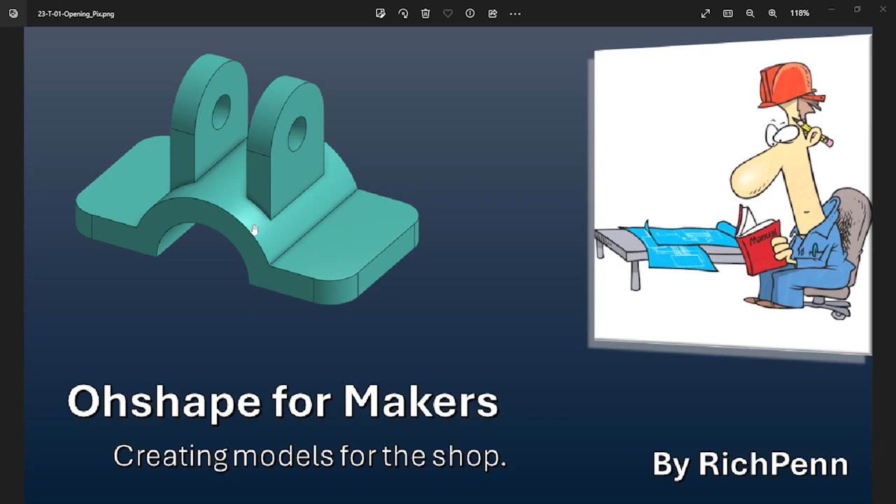This is the part for today, and the part is actually going to look like that. Notice the really fine, high dollar free 3D paint I'm using - don't have a good thing, so make do.

This part, if you look at it, looks weird, but if you go at it logically, it's not really bad. If you try to do something a little bit off, you run into a lot of problems with where these two flanges intersect with that curve. The solid modelers get a little crazy and start having some problems sometimes if you don't do it just right, but we're going to avoid it by doing it the simple way.

What we're going to do is start a drawing, and we're going to be looking at the center line from this face, and we're simply going to draw this shape and extrude it out till it's that width. Then we're going to draw these two ears in it and extrude them out until they're this width, and then we're going to poke a hole in them and round the corners and be done. Simple enough. So let's get things set up to where we can get started.

In Onshape, create a document: 23-T-01-half clamp.

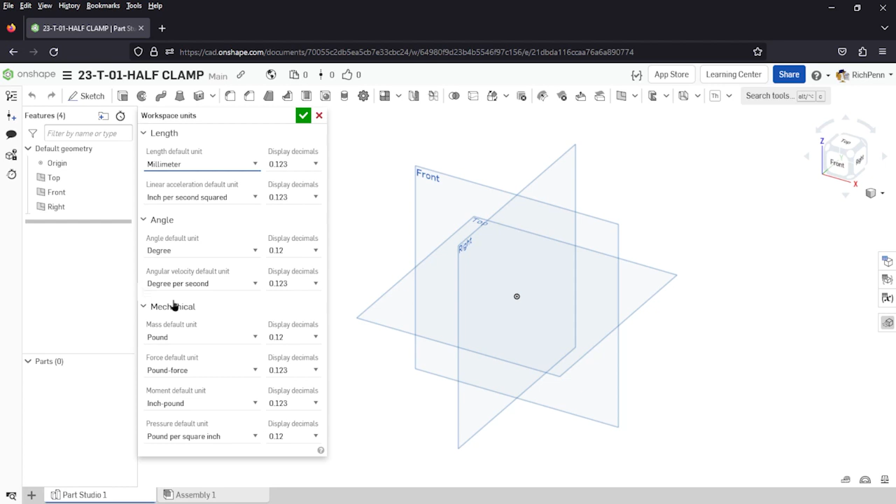If you'll notice, this is in millimeters, silly millimeters, so we have to tell Onshape by hitting the hamburger menu, coming down to workspace units, select inch and go to millimeter, select mechanical pound, go to gram, green check mark, and now we're in millimeters.

To start drawing, we're going to use this plane to draw this, and we're going to draw it as a rectangle, and then we're going to draw it as two arcs.

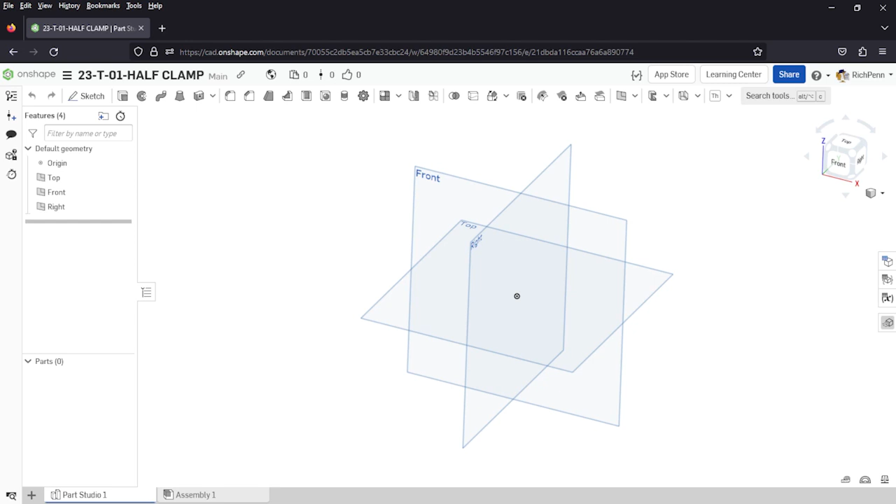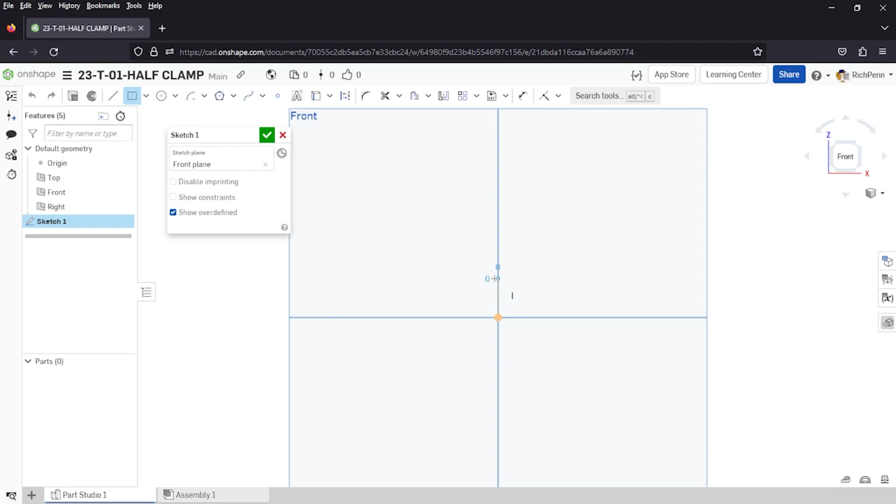So, front plane, sketch, N for normal. Go to rectangle, you want center point rectangle, catch the vertical line somewhere above this dot, click once, pull out, pull down until you connect with that line, click one time.

This distance on the blueprint is 13, and this distance is 150.

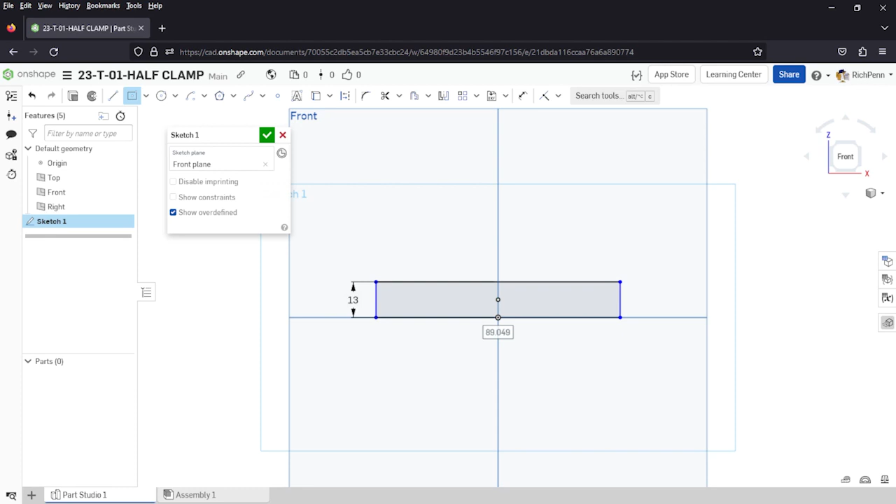Well, it missed. Okay, if you lose it, you can always go back and just type D for dimension or select dimension, then select that line and type in 150. It does an auto dimension when you first create it. If you lose the auto dimension, you just go to the dimension tool and dimension it. Hitting escape will turn that off and let you catch this. Left mouse click, drag it out and put it somewhere where it makes sense.

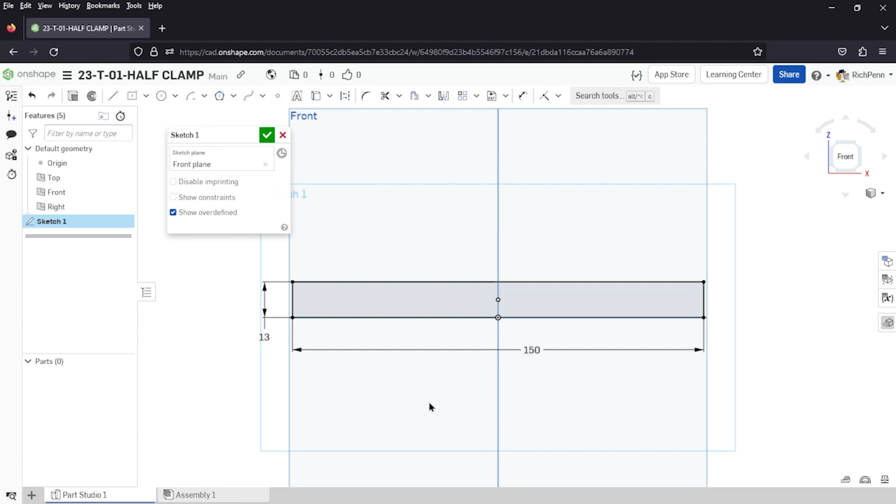Now what we need are the two arcs. The two arcs, if you look at them, are defined as a radius of 38 and a diameter of 50. They did it because this was a contest drawing, and they like to throw in little oddballs just to catch the contestants.

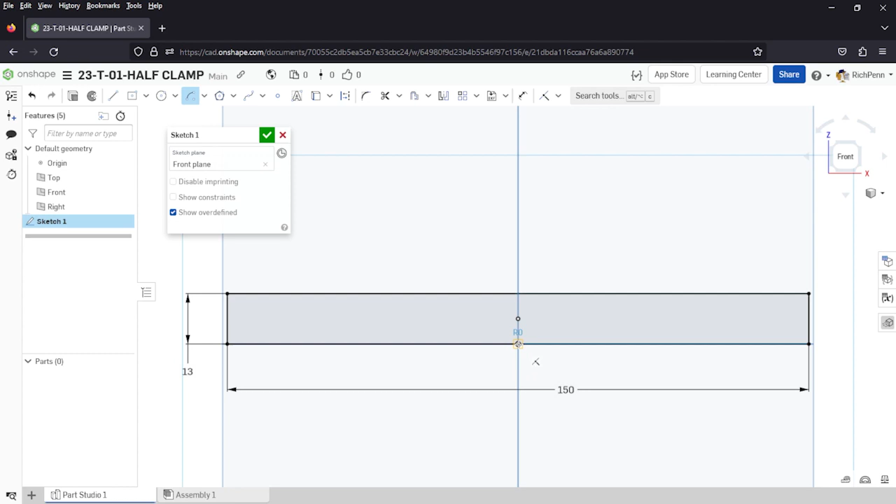So what we're going to do is draw the radius of 38. We're going to come up to the center, to the arc tool, and take center point arc, select the dot right here. You get a big circle. Doesn't matter where you go, just select this line and tell it you want a half circle to that line, and it will ask you for the radius, and the radius is 38.

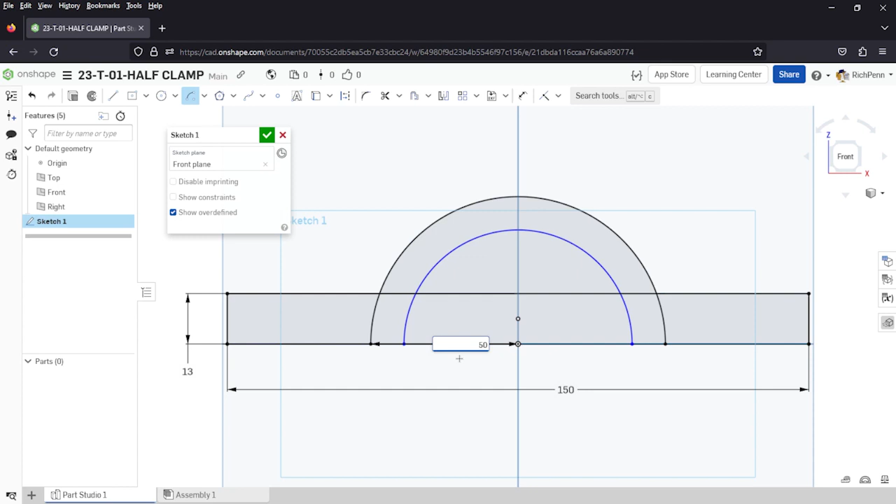Now we're going to do the same thing again. We're going to click, pull out short of where we were, go half circle, and remember the drawing gave us a diameter of 50, which would be a radius of 25. So I'm going to type in 50 divided by 2, let the system do the math, and select check mark. Now what we want to do is extrude this, and we're going to select extrude, and select the pieces we want to extrude.

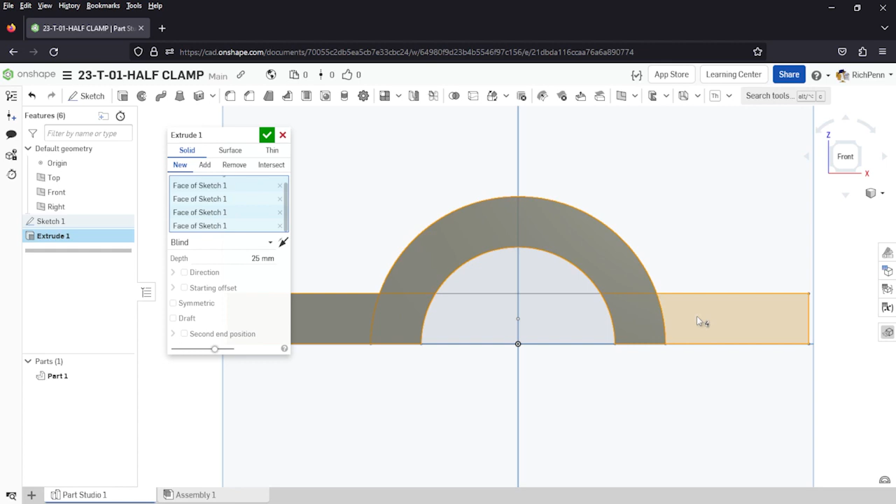Grab your mouse and tilt it a little bit. Select symmetric. If you'll remember, we're going 83. So we type in 83, enter, green check mark, and there is the first part.

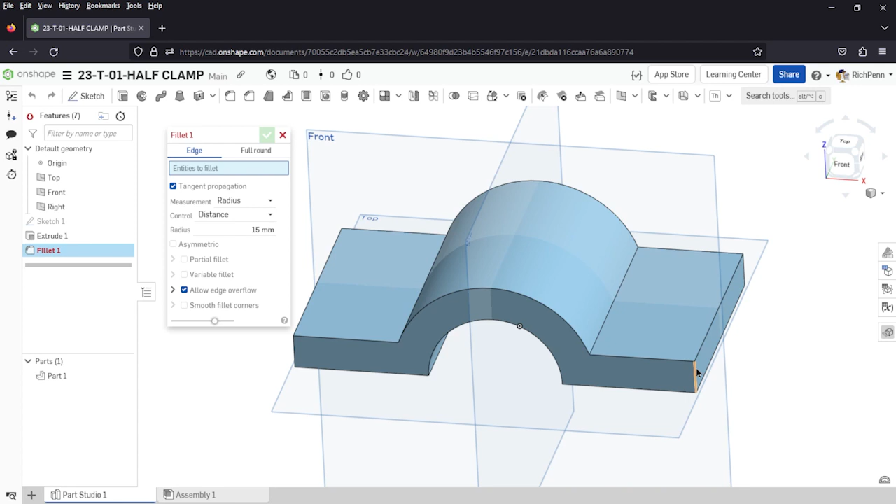To round the corners, we'll go to the fillet tool, type in 15, select that line, that line, that line, that line, and green check mark. That finishes that part.

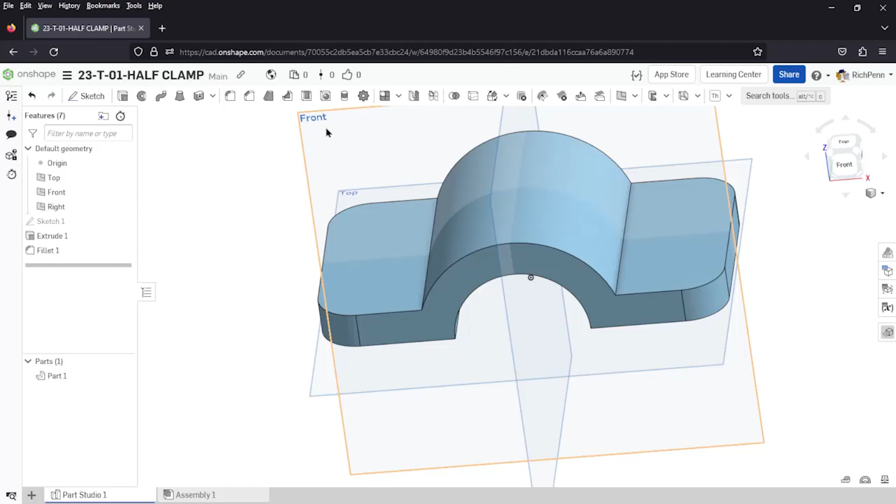Now we need to do these two ears. If you'll notice, the ears are symmetrical about the center line. It's 28 millimeters between them, and each one is 13. Select front and sketch, and N for normal.

Now you need to come up here to this, it's called use, project, or convert. What we want to do is select that line, which references the geometry we did in the new sketch, and ties it together logically in the back end of wherever the history is.

It will come over here to center point rectangle, and come up here and select construction. We will select a line here, pull it up some distance, and remember this distance right here was 28. The rest of it we really don't care about right now, so we'll just hit enter or escape and leave it.

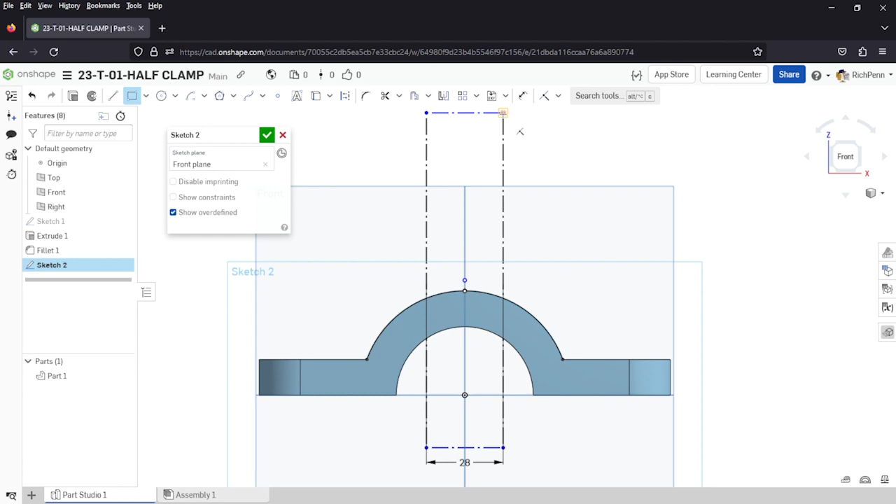Now we need to make the two ears, and to make the two ears we'll take a corner rectangle. We'll select this corner, pull out a little ways and pull down until you connect with the arc here. When you connect with the arc, it will ask you, maybe, there it is, and you can type in 13 and escape.

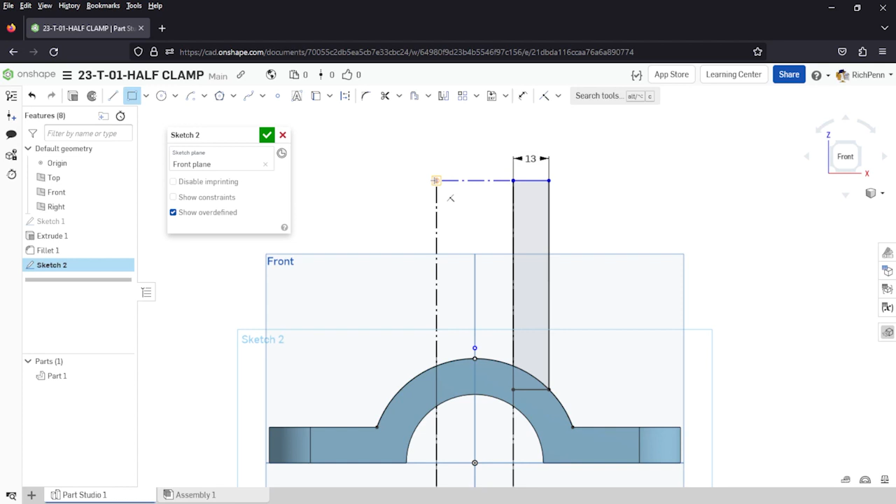Then we will do a corner rectangle, connect with the corner, pull down until you connect with the radius anywhere, click on it, type in 13 and hit enter.

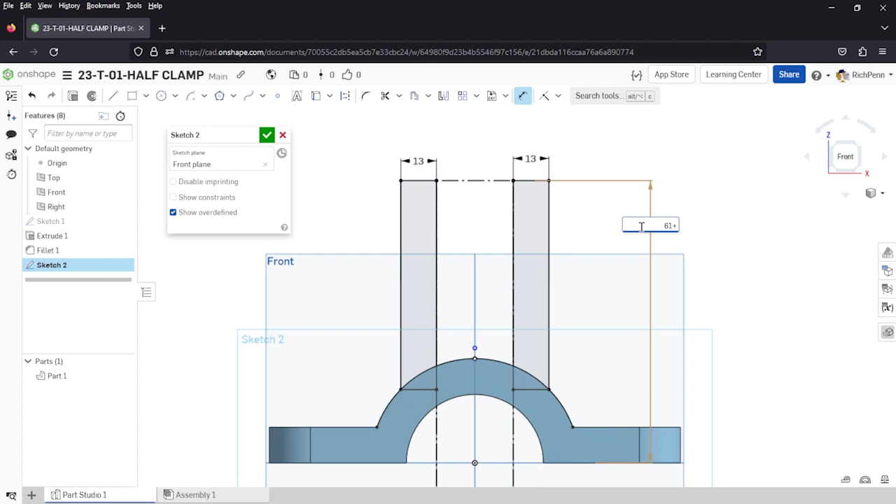Now the only thing we have left is the distance from here to here, which is 61 plus 25. So we will go to the dimension tool. We will select the base of the part, select the top of the tab, and type in 61 plus 25, enter key, and a green check mark to close out the sketch.

And now we have our ears ready to extrude. So we will select extrude, symmetric, and select the two ears.

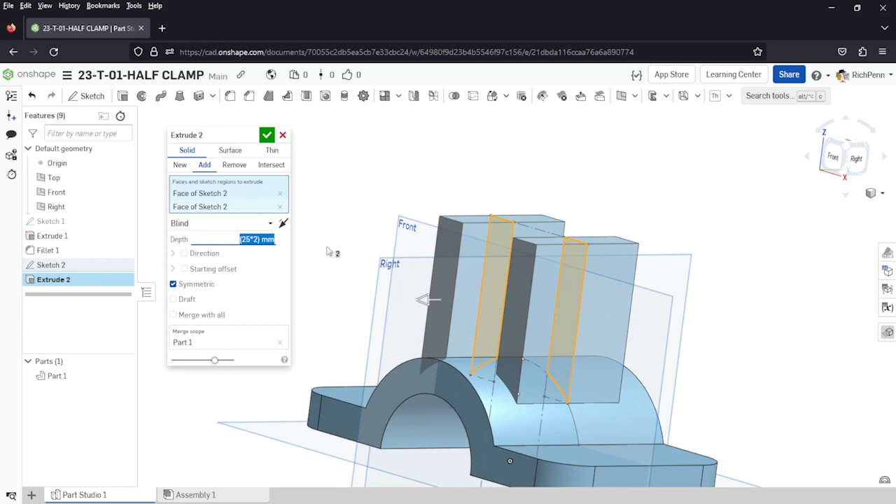If you'll remember, we had a 25 radius, which means this is 50. So we will type in 25 times 2. You can do it in your head, but if you do it this way, when somebody reworks a model, they will see how you got the answer.

Okay, green check mark. Let's see how this fits perfectly up here with no errors. That's what you're looking for.

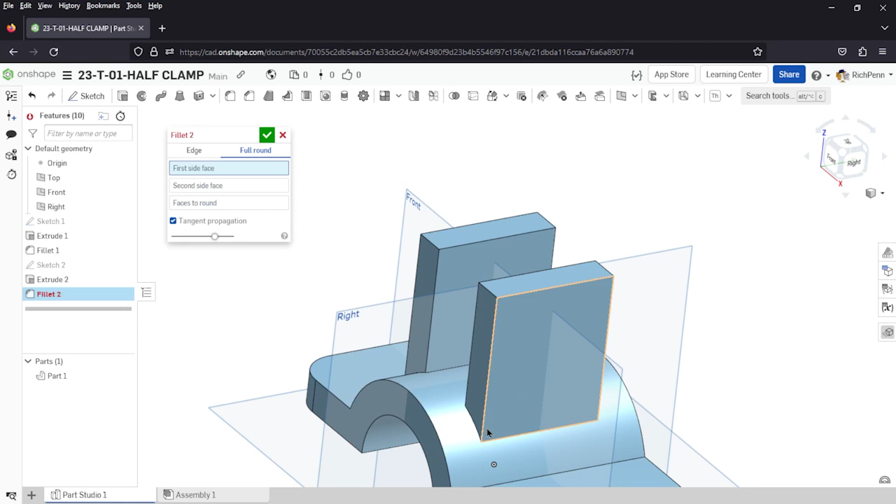Now to round this, there's a dozen ways, but the built-in tool is called fillet, and one of the fillets is called full round. I can select this part and turn it by holding the right mouse button, select that part, then select the top and a green check mark, and I've got a perfect fillet.

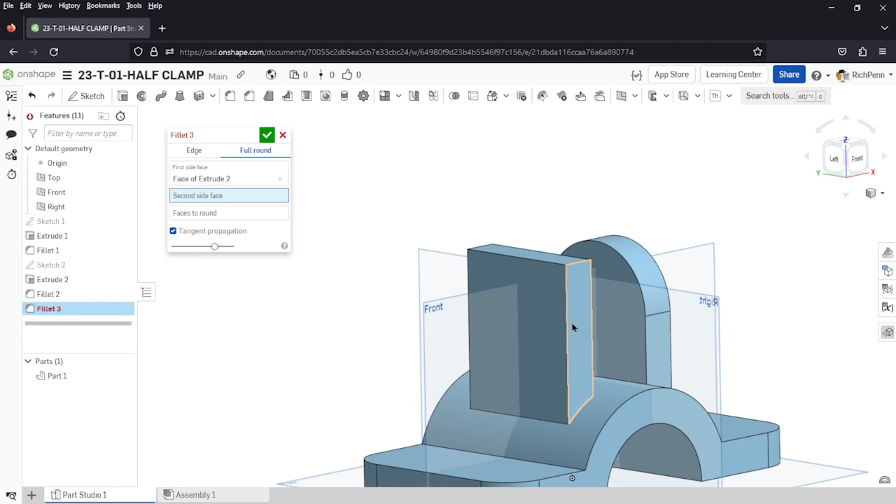So I can go back, fillet tool, full round, one edge, the other edge, and the top edge, and a check mark, and I have everything except this hole.

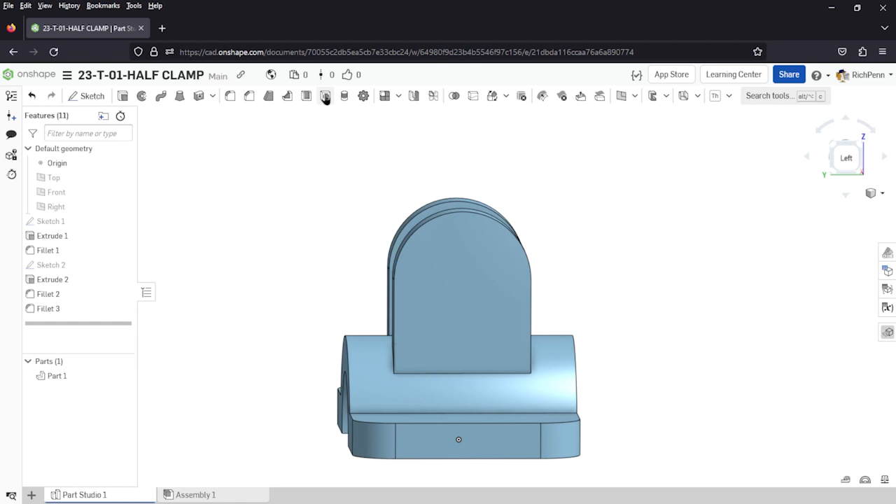If you type in P at that point, you can get rid of all those planes because we're through with them. The easy way to get a hole is to use the hole tool.

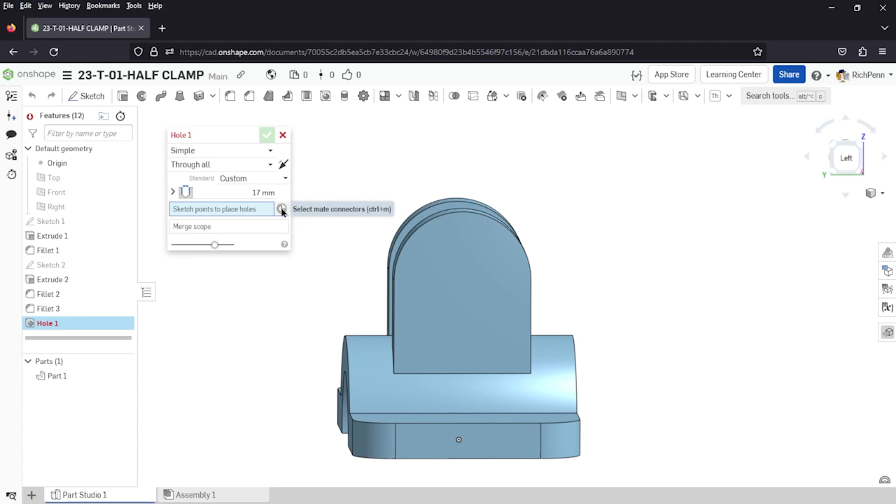If you will notice, this hole is at the center point of the radius, and it is 17 in diameter. So we will tell it we want a 17 millimeter simple hole that goes all the way through the part, and then this little strange looking connector right here, click on it one time and move your mouse over, and when you touch the outside periphery, it will light up and show the center point of that radius.

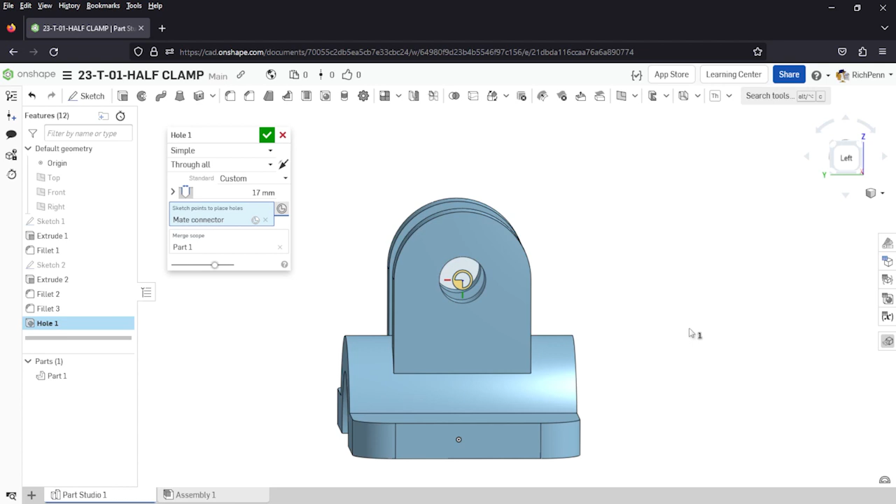And when you click, it will use the center point of the radius as the start of the hole and run a drill through the hole and out the back side. We click green check mark and the part is finished.

If you want to, right click the word part and go to appearance, you can make it whatever color you want. Or we can just give it a gold star and be done.